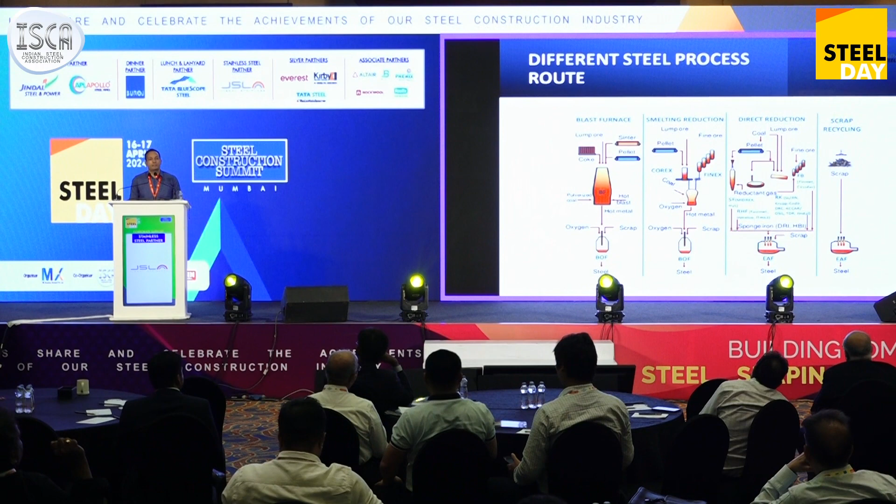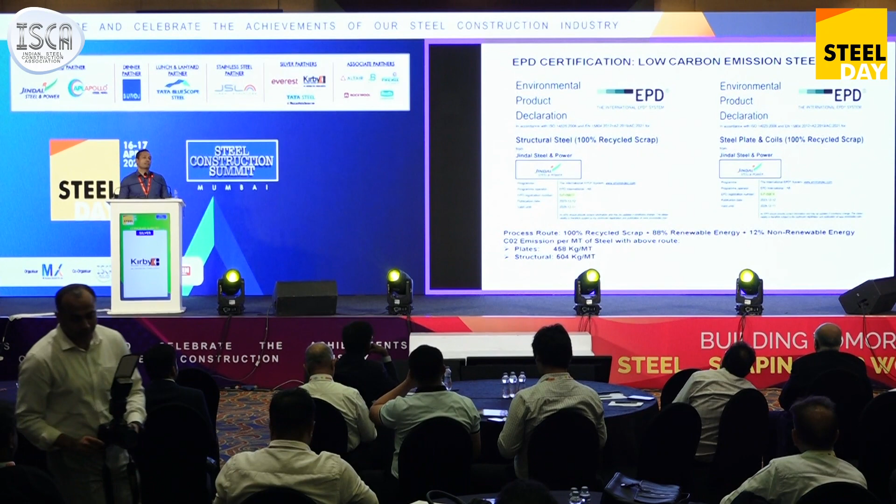In case of steel, it can be manufactured in various ways: blast furnace route, smelting reduction, direct reduction, and the last route using recyclable scrap, called scrap recycling. All four are available with us. We can manufacture from the blast furnace route, DRI route, or sponge route. At the same time, we have a furnace which can use 100% scrap. With the scrap route, we got EPD certification, wherein our carbon emission is in the range of 500 kg per ton, which in normal circumstances would be close to 2,500 kg, that is 2.5 tons per ton of steel production.

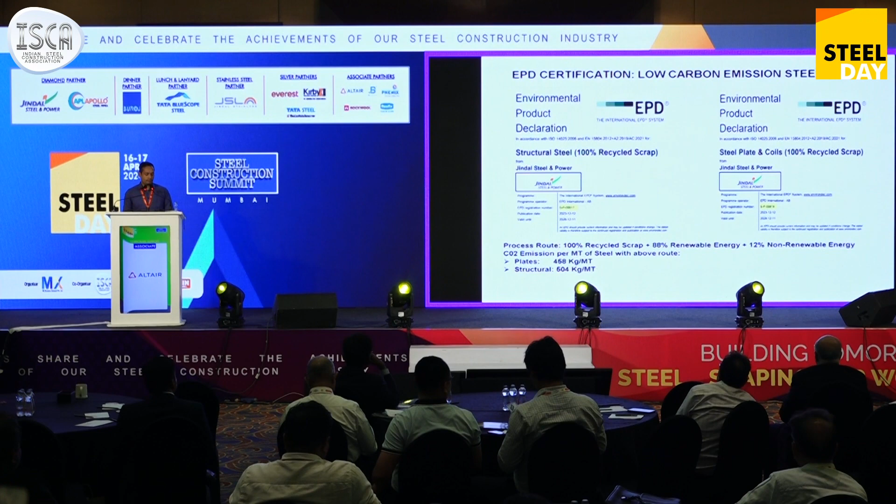These are our typical ranges for structural steel, starting from the UB, you can manufacture from 152 to 886, and that we can give in various flange and sectional widths. At the same time, we have universal column 152 to 368 into 406. We also have HE section, W section, NPB section, IPE section, HE section, technically called WPB section, wide parallel flange beams, which we can supply in various sectional weights.

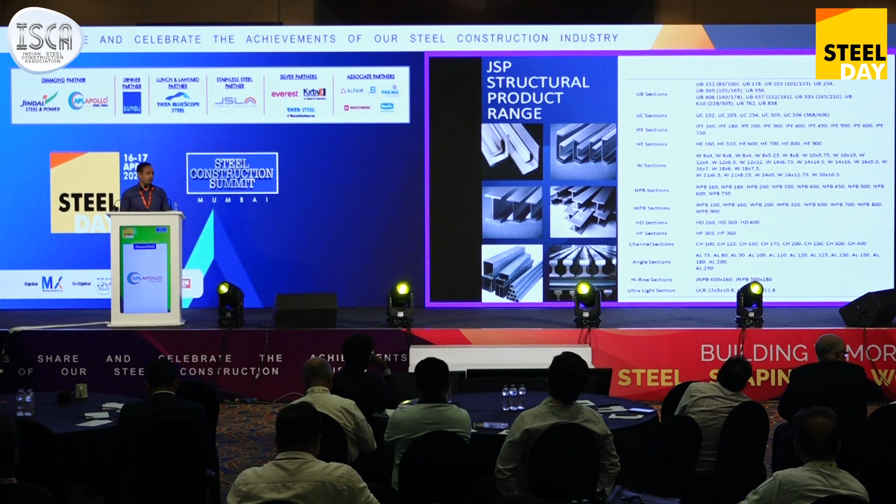This is a typical process flow diagram of any rolling mill. You may be wondering how we can manufacture so many sections from one mill. The answer lies in the roll design. There are 4 rolls, 2 vertical and 2 horizontal. With each roll set, we can manufacture a particular family of sections, like UB203 into 133 will have one roll set, and that roll set can vary the distance between the 2 rolls, from which we are able to get various web and flange thicknesses which will govern your sectional weights.

We use our own raw material, that is a bloom. The bloom has various grooves inbuilt which help us do the rolling in a proper way.

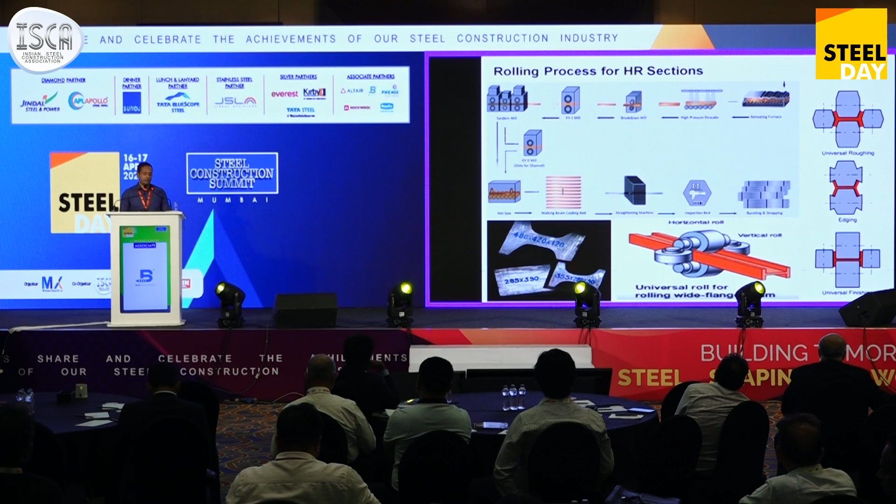As we know, steel has inherent advantages over RCC. It can be built super quick. In the last presentation, we saw that a project can be completed within 15 months with the help of steel. It couldn't have been completed in such a quick time if everything had gone on RCC. We can also look into expansion—if you want to do any further extension of any structure, it can be done easily. If it has gone through any catastrophe or failure, it can be repaired. At the same time, it can be done in any type of shape and architectural design.

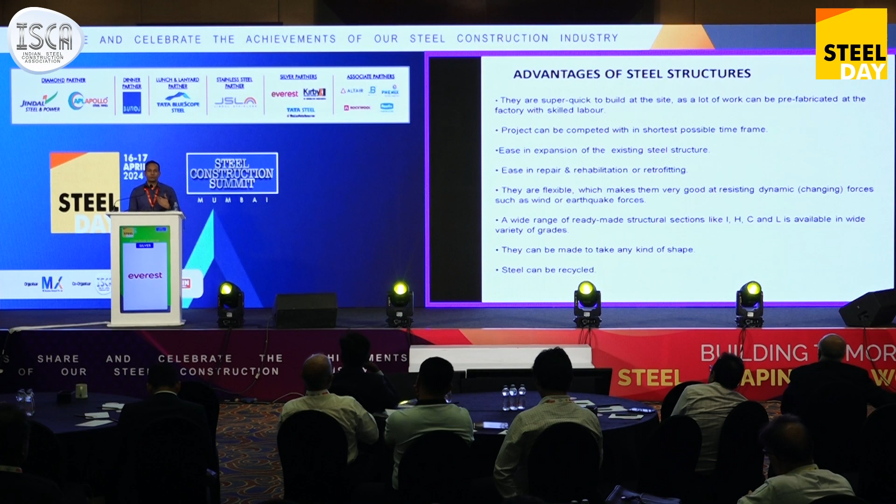The last but most important point is that it's 100% recyclable. If you see any RCC building when it's demolished, you know how much debris and other things are generated which cannot be used. Even the TMT bar used inside will not be in good condition and can only be used as scrap. Here, an all-steel building can technically be used as raw material to make new steel buildings. These are the typical advantages of JSPL.

JSPL is manufacturing parallel flange beams in which the flange is parallel—there is no taper at the end. We have better properties with respect to the taper flange beam.

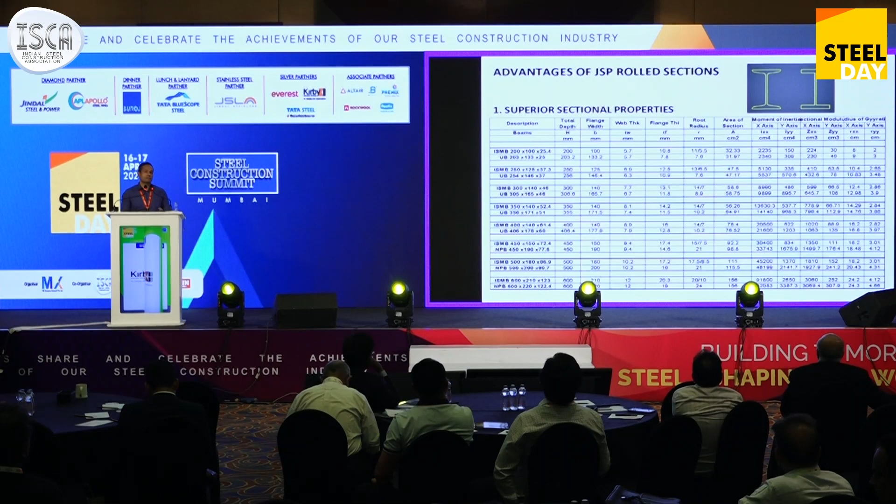With the same web and flange combination, we have better XX and YY properties which give you better design liberty for a required section. At the same time, with the same web and flange combination, we have various sectional weights available. For example, UB 457 by 191 ranges from 67 kg per meter up to 161 kg per meter. So you are not limited by the choice; you can optimize as much as possible, because putting extra sectional weight not only increases dead weight but also increases other supporting costs like transportation, labor, and lifting.

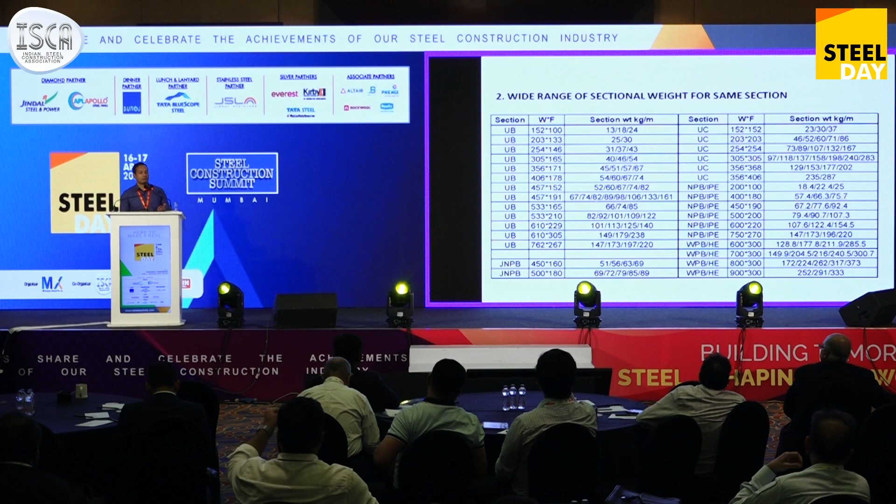This is one more thing which differentiates parallel flange beams from tapered section beams. Here our flange is parallel, so you don't have the issue of bolt shank bending. In this typical diagram, you can see a tapered section beam where tightening the bolt causes the shank to get bent. At the same time, if you decide to do welding, at the end you have very little surface area where you can do the welding.

If you see the ISMB 200 by 100, you have a flange of 100 mm only, but in case of UB 203, you have a flange of 133 mm width. So technically, rather than having 2 or 3 connection bolts, you can go for a wider connection joint that will avoid the zipper effect. What is zipper effect? Once the initial bolts or joints fail, it puts pressure on the next joint and it opens like a zip. So technically avoid this when you do the connection joint.

In case of tapered flange beams, the length of the splice or the joint gets almost double compared to parallel flange beams.

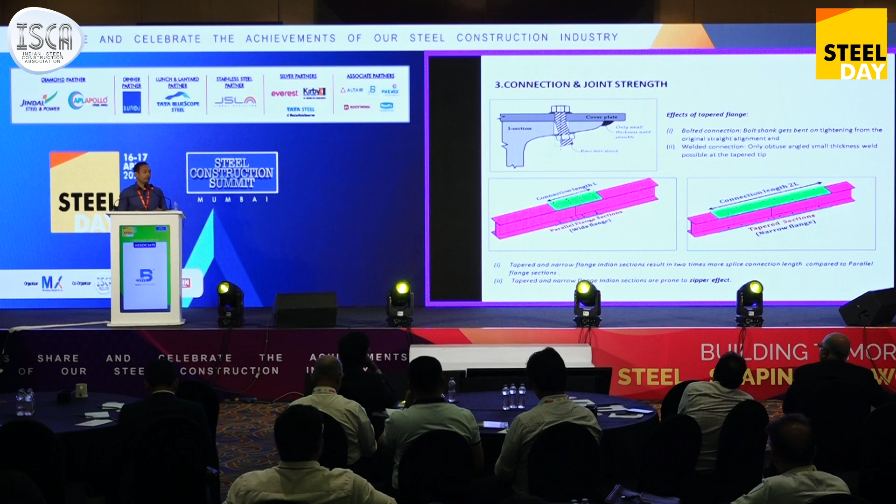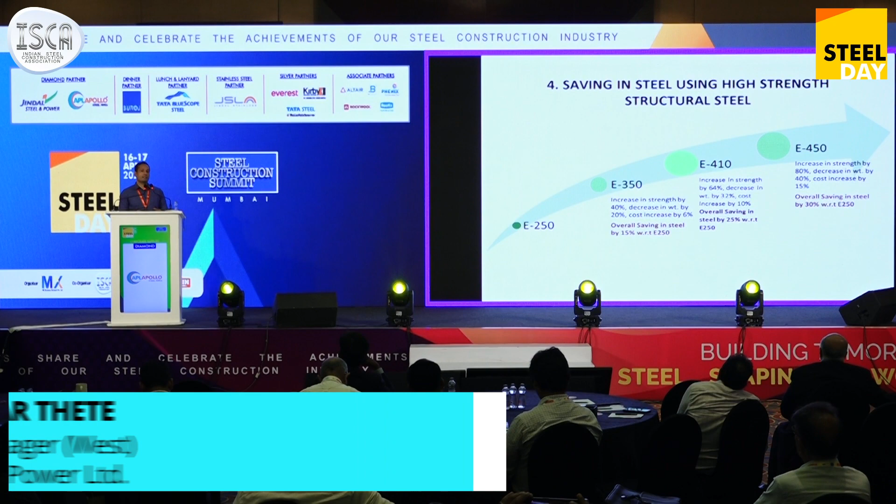So we are talking about up to 15% increase, but we have to keep in mind that you need to start designing with the high strength steel from the beginning. It is not that you design something and then in between switch from low strength to high strength - then the design will not justify the saving. So it's always better to consider what strength we can optimize from the start, and once designing begins with high strength steel, you will find substantial saving.

In fact, JSP was the only company, the first company, who started manufacturing TMT in 550 MPa grade. Then slowly everybody moved to 550. Earlier it was 415, then 500D. Now the entire industry is stabilizing at 550 because people have started understanding the advantage of using high strength steel, whether it's TMT, plates, or beams.

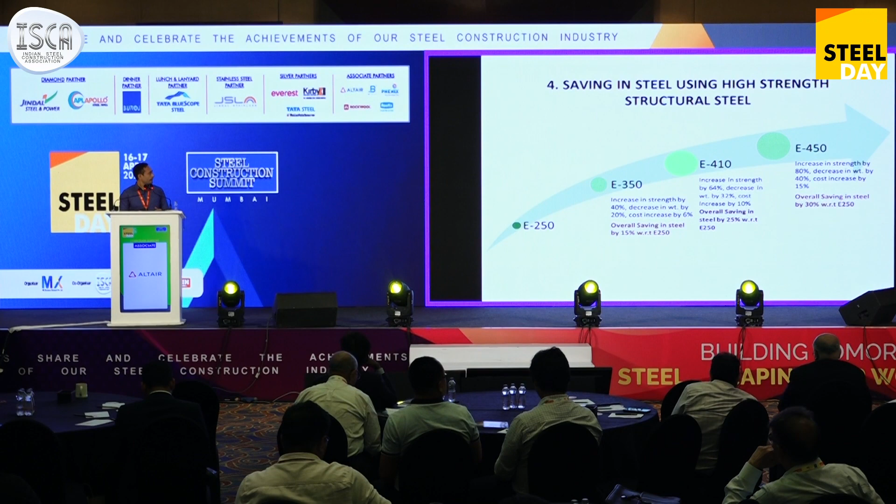Another advantage is that we can give customized length. In the market, typically people use 12 meter lengths and then cut the end piece or do joints. Here we can give you customized length right from 6 meters to 18 meters, so it can avoid wastage as well as avoid joints.

We can also give faster and time-bound delivery, because whatever section we are manufacturing, we are rolling all sections at least once a month. So you have a definite timeline available with you.

Since we use virgin steel and virgin iron, our mill products are better in having the YS-UTS ratio, so elongation is more than whatever is required. Also, we can supply on a number-of-pieces basis so there won't be any storage at the project upon completion.

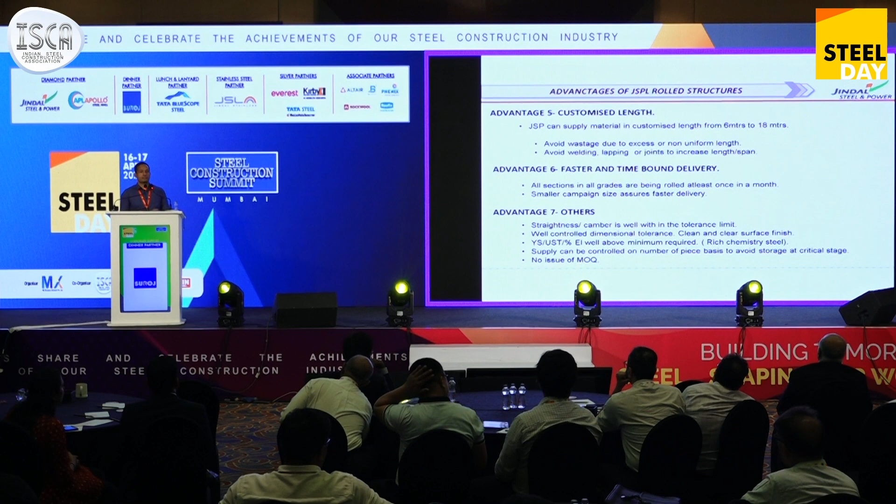At the same time, we can supply without any MOQ. As we roll in a campaign of 1,500, we can roll maybe 5 ton, 10 ton, or 50 ton. But it is always better to have an MOQ of 5 ton per section so that it is easy for us to do the supply.

So this is a typical summary of how you can optimize. You can have superior products, optimized sectional weights, customized length, high strength steel, and at the same time get delivery on time - all of these benefits together.

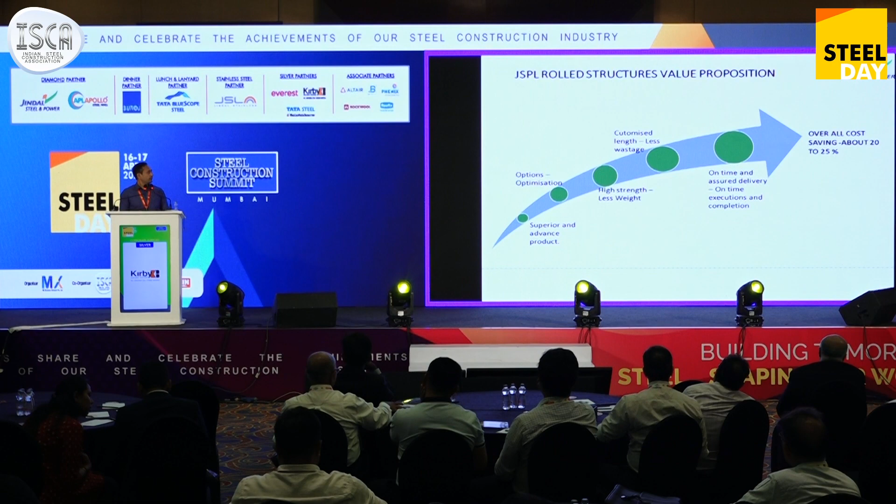You can save cost up to say 20 to 25% without much effort.

Now coming to the next grade we have developed, called fire resistant steel. It is as per IS 15103, which calls for sustaining 600 degrees Celsius temperature for 3 hours, where your YS or UTS will not drop to less than 2/3 of the original design.

Why is this required? Because as more steel structures or residential buildings are coming up, fireproofing is an area where people find the costs prohibitive. At the same time, applying external media is time consuming and labor intensive. So it is as good as taking a vaccine for the corona rather than treating the symptoms. Once you have fire resistant steel, you can use it bare, with no need for any external media or treatment for fireproofing.

All the sections we are producing are available in fire resistant grade, and as of now we are making it equivalent to E350. So it is actually a high strength steel with YS minimum of 350 and UTS of 490 plus. Elongation and other properties are typically the same as normal steel, so there is no issue of weldability or formability.

When you do the welding, the grade of electrode is already mentioned, E7108. The weld joint is also well protected from fire because you are adding the same parent material to the weld joint, and the thickness of that weld portion will be increased. So there is no issue of any failure at the joint.

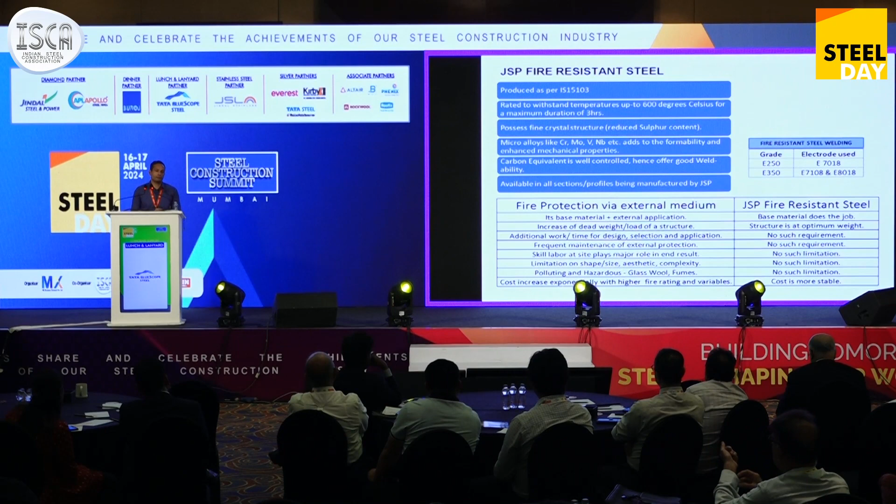Now the other product we have started is the JSP hollow section. It is a DFT technology. In normal circumstances, people traditionally make the round section and then roll it into square or rectangular. Here we are not using that method. The strip will be folded and formed directly into the rectangular and square section.

In case of rectangle, we can go from 100 into 150 up to 450 into 600. In case of square section, we can go from 150 into 150 up to 600 by 600. In case of thickness, we can go from 4 mm to 22 mm, and the strength we can go up to 550 MPa.

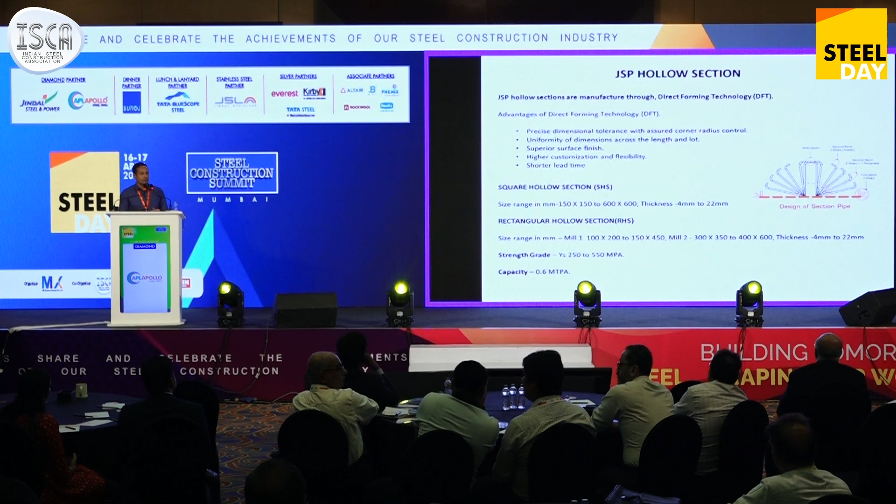For this, we are going to use our own raw material, so there is no issue of availability or any quality issue or quality parameter. These are the typical advantages: we can give you superior finish, shorter lead time, and at the same time the technology we are using is best in class as of now. These are the range.

This is one new product we have added to our portfolio, which we discussed yesterday. It is a corrugated web beam or sinusoidal web beam. Here the beam is the same as a truss beam, but in this case the web is not straight, it is corrugated. We have the corrugation done through cold roll or cold fabric forming technology, in which it will be welded to the beam. Here we can give you web thickness right from 1.5 mm.

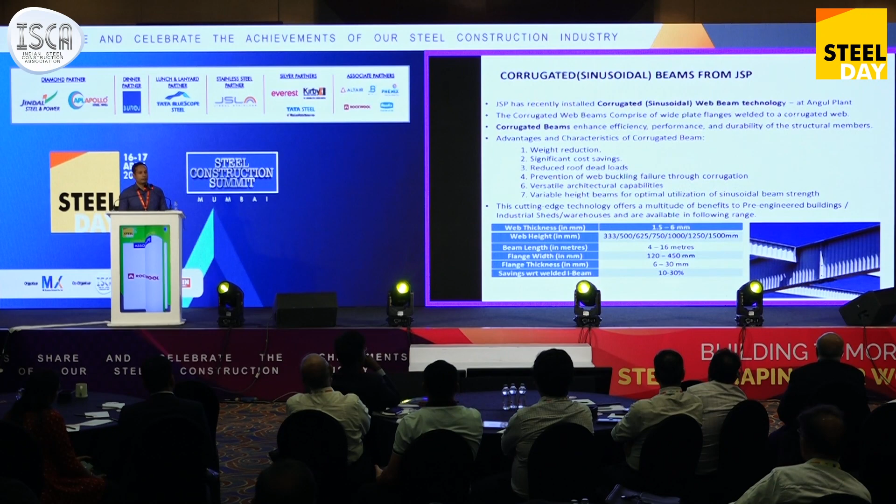Typically people look for 4 mm, but we can go up to 6 mm also. In case of flange, we can go up to 120 mm up to 450 mm. Standard length can be 12 meters, but if required we can go up to 14 or even 16 meters also. The same beam can be supplied as a tapered beam or asymmetric beam, so there is no constraint on how to go for cutting and welding. It is not required, we can supply you in tapered as well as asymmetric beam.

These are typical use cases where JSPL steel has been used in high-rise buildings. Here we have developed sections which can be used as a ready-made grid, like 450 into 160, then 500 into 180. It has been used in various projects outlined here, including Chalet and DLF projects, which has substantially saved not only weight but also construction timing.